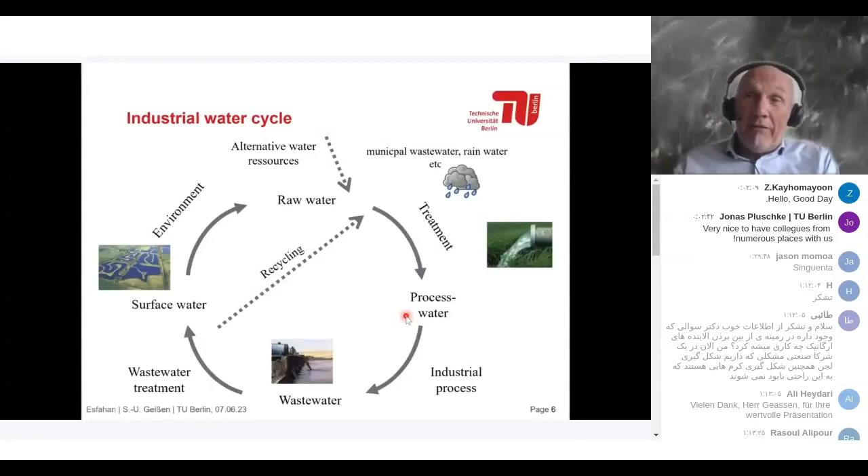We can take the effluents from industry—it's the same situation. We have production processes that are not balanced out over the week, so we have fluctuations during the week, during the day, and even during the hour. So we have to have buffers.

That's one challenge. Secondly, we have to have a transport function—we have to transport the water after treatment from one place to another, and this is a challenge. It's also a technical challenge, but we always focus on membrane processes, biological processes, adsorption, extraction and so on, while in most cases we forget the logistics. It's very important to keep in mind the transportation, storage, and handling of water after treatment.

So producing water out of effluent is not a challenge—you can do it, it's just a question of costs. But finally we have to store it somewhere and transport it, and then the question of microbiological contamination comes into play. In particular, you have high temperatures in Isfahan, and nowadays also in summers in Germany and Middle Europe, up to 30, 35, 40 degrees.

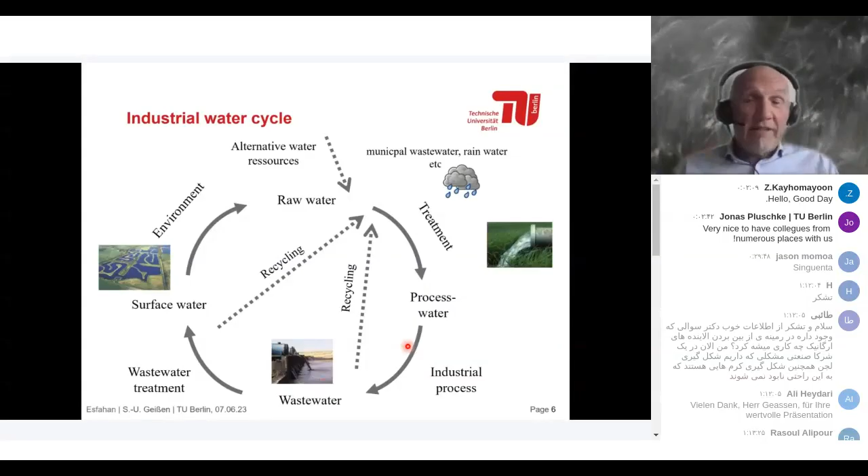Formerly, at different places, always fresh water has been used. So this is one example of many others. Go into the industrial processes and look what possibilities you have. This is something I mentioned partly already.

We have to look at the contents of water. We are always talking about wastewater, but looking at the content of water, it contains organics, inorganics meaning salts and metals, heat energy, and the water itself. Basically we are interested in the water, but nevertheless we should also be interested in the heat energy. This is something we have to take into consideration additionally. I will give you some examples on this later on.

So the question is, what will be the future for industrial processes? I would like to show you a publication from 2004. It's not very new, but what I have also read from the United Nations, the worldwide estimations with respect to industry are already the same. They are predicting an increase in water use or water abstraction. For this publication: manufacturing, 30% increase from 2000 to 2030.

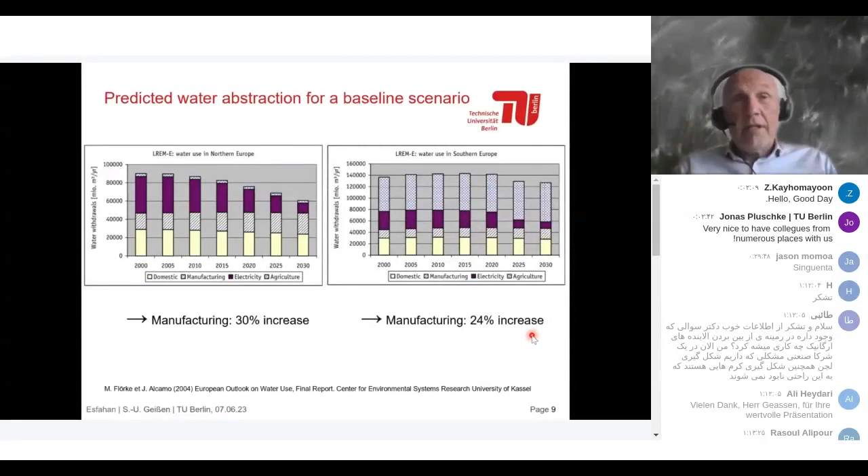This was in Northern Europe, and even in Southern Europe, 24% increase. The numbers aren't so important, the message is that all the predictions indicate we will have an increase in water use worldwide. That was predicted for Northern Europe and Southern Europe. The reason is high quality products require higher water demand.

But generally the question is, what is the German experience? And the German experience is different. We have a very old example, but nevertheless it's history - let's say it like this, it's history. This is for the pulp and paper industry.

Going back to 1974 in Germany, these German paper factories - we're looking at wastewater production in liters per kilogram of paper produced. There's a paper machine shown at the upper right-hand side. So how much water is used to produce one kilogram of paper? It was about 50 liters of wastewater produced per kilogram of paper in 1974.

What you can see in this diagram is that until 2001, we had a decrease of roughly 80% in wastewater production from the paper industry. Not absolutely specific numbers, liters per kilogram or cubic meters per ton. As a mean value in 2001, and nowadays it's more or less the same range, maybe it's 8 liters per kilogram of paper. So we have a dramatic decrease in water use.

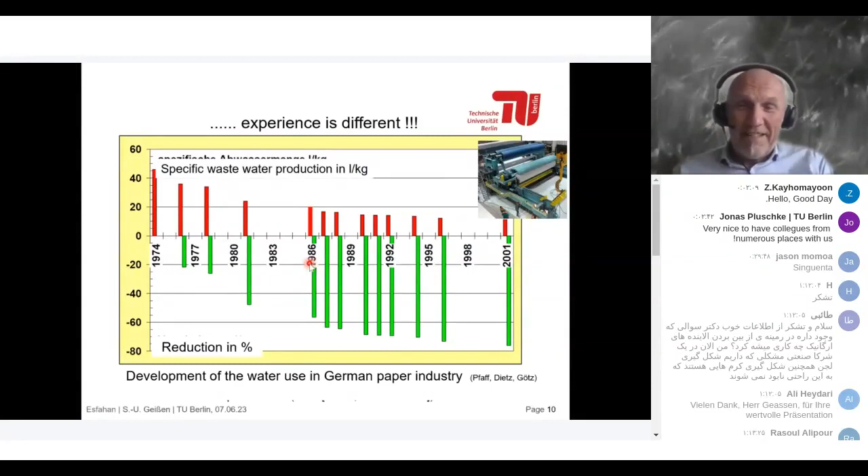These are the two effects: better or more efficient production machines and production processes, and additionally awareness. I've made the same experience when I moved into these industrial facilities many times - even nowadays I can observe possibilities to save water, very simple ones partly. So therefore, do it. Just do it, that's my recommendation.

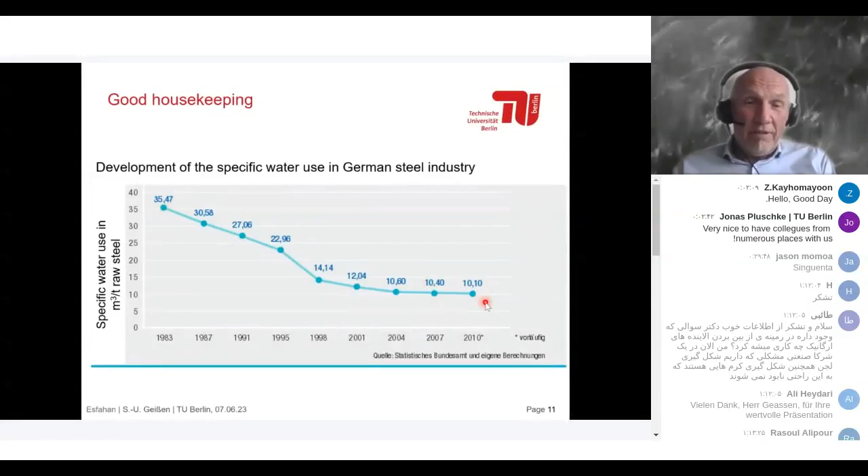So that was the paper industry. This is another example from the steel industry - specific water use, cubic meters per ton of raw steel. It's dropped down, even though in Isfahan the numbers are lower, but nevertheless for me the absolute number is not so important - it's just the possibility to reduce the water demand.

When we talk about water use, we have to ask what should be the quality of the raw water, or the quality of the processed water we use in industrial processes. We can utilize different kinds of raw water: surface water, groundwater, tap water, and alternative water resources like processed wastewater, rainwater, and municipal wastewater. All these raw water resources are utilized.

These are technologies to remove manganese, iron, suspended solids, etc. We have different possibilities, starting with natural-based bank filtration, for example. In Berlin, we produce part of our drinking water by bank filtration from the river. It's a natural-based system, and it's been working quite well for many decades. Natural systems like this are not too bad.

We have ion exchange—I guess all of you know ion exchange. We have flocculation, precipitation, filtration, disinfection, membrane separation, distillation, oxidation and reduction. These are the possibilities to pre-treat the water in order to make processed water out of it.

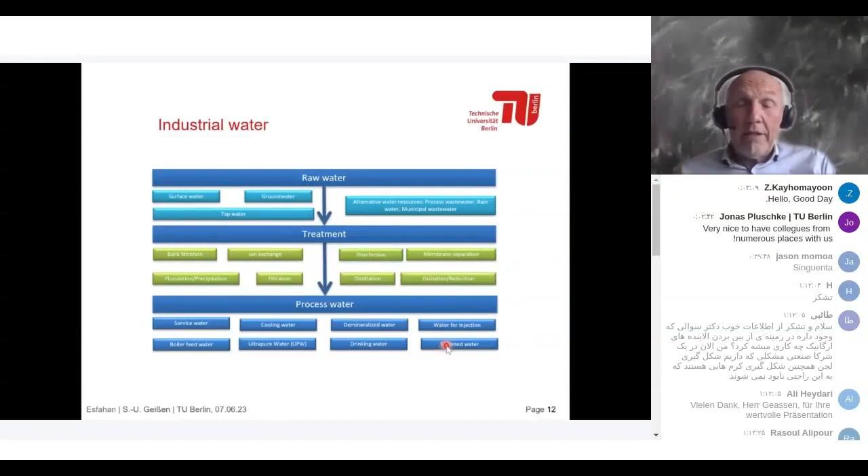These examples of process water qualities have different demands with respect to quality, and therefore this offers opportunities. Preparation of process water requires treatment—that's something we have to keep in mind. This is a question of costs, capex and opex, and the different quality demands offer opportunities for recycled water.

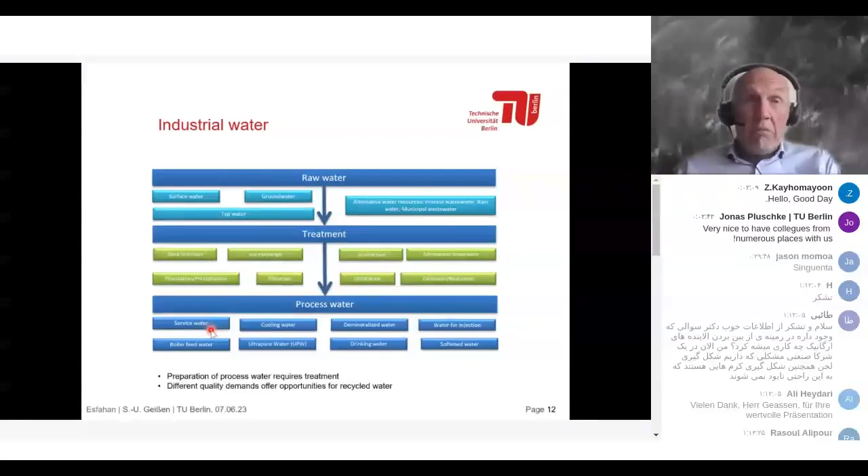Using recycled water for water for injection is not recommended, certainly not in the pharmaceutical industry. But you can use recycled water simply for service water, for cleaning cars or trucks, or cleaning surfaces in production facilities. You need certain quality requirements like no germs, no virus, no bacteria, but the quality demands are not as important.

This offers different opportunities, summarized here: different process water qualities offer the opportunity to reuse wastewater demand-oriented, and what's required is intelligent water management. This is the basis to apply a water management system.

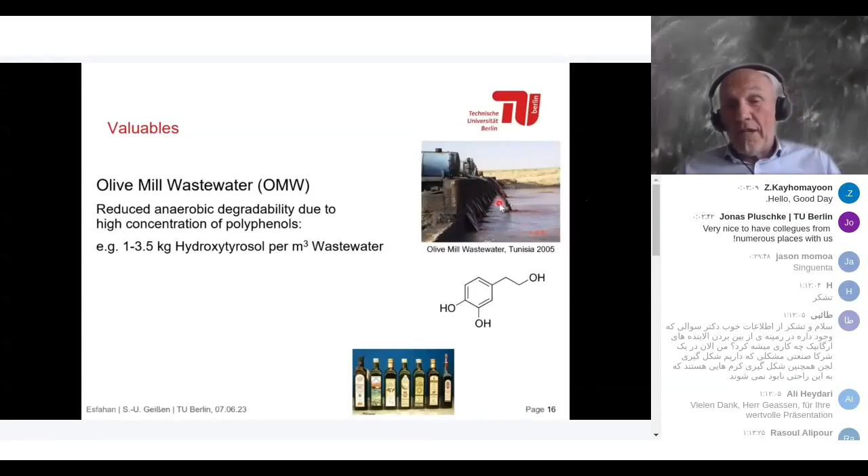It contains high concentrations of COD, in the range of 100 grams per liter, so highly contaminating the environment. For sure these open ponds are not sealed, so part of the olive mill effluent is entering the groundwater, and groundwater is also a scarce resource.

But nevertheless, what I'd like to highlight is that even in this wastewater, in this effluent, we have a high concentration of valuables—in this case polyphenols, 1 to 3.5 kilograms of hydroxytyrosol per cubic meter of effluent, which is quite high in purity, and you can easily calculate it's worth 50 euros per gram, so a high value is contained in these effluents. But this is a price for high purity, frankly speaking, and to generate this purity out of this effluent is more or less not feasible, I would say.

But nevertheless, it has a value, and we are operating a containerized plant nowadays in this region, in the middle of Tunisia, in order to treat the effluent so that the polyphenols can be recovered. Additionally, the polyphenols are natural-based substances. Olive is producing polyphenols, and therefore eating olives, but also consuming olive oil, is healthy because of the polyphenols. They have antioxidative properties, mostly present in the olives themselves and in the water, in the effluent here.

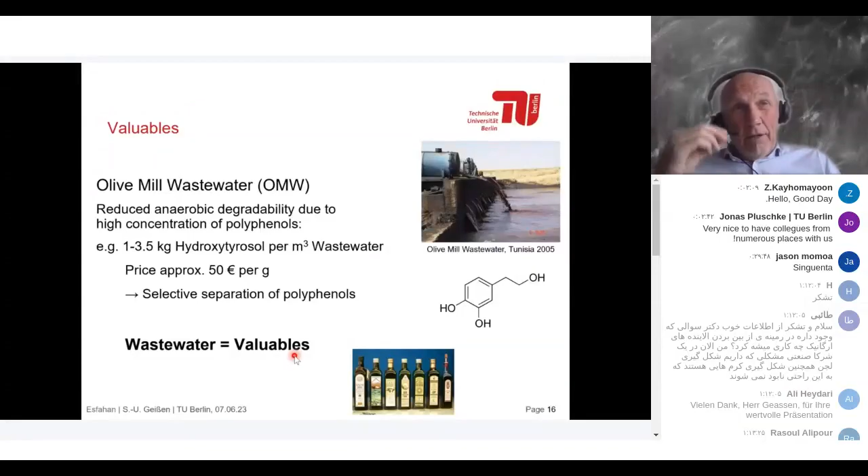And this you can transfer—it's an extreme example, I know. In many cases we don't have such high concentrations of valuable substances, but nevertheless, always think about this when going into a project. Think about the content of the COD, the organics, the TOC, the total organic carbon. What is the content of this carbon? Are there substances which might be of interest? Finally, those substances come out of the production—they're not coming from the heavens, they're just added by humans during industrial production. Therefore we have to ask ourselves if it's feasible to recycle those substances additionally. I know in many cases it's not feasible at the moment because raw materials are quite inexpensive. And the second point, we always have a mixture like here—you see it's dark, almost black, the effluent, and it's really difficult to treat and extract the polyphenols from such effluents.

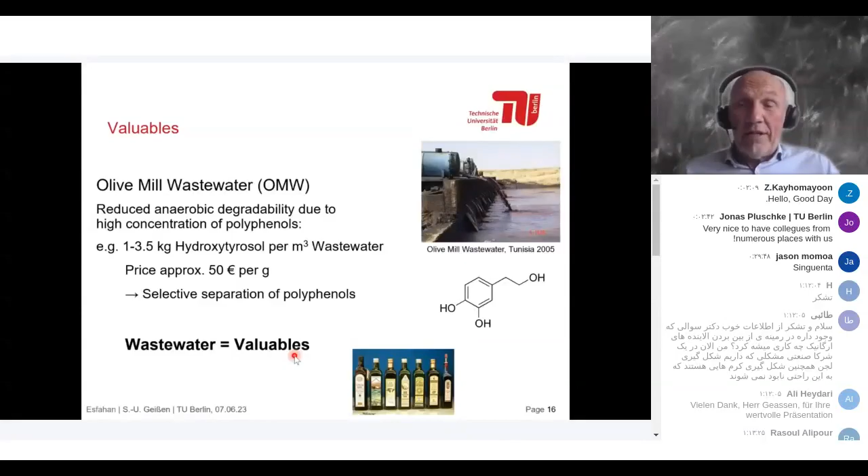But nevertheless, keep this in mind and ask yourself what are the organics present in the effluents. So we have the inorganics—that means the salts. In each and every effluent, we have salts.

That's also becoming a major concern in Germany, because maybe you've heard about the fish dying in the Oder River, near Berlin, partly the border between Germany and Poland in the northeastern part of Germany. You might have heard last summer, late summer, a huge dying of fish in this river. It was caused by low water flow due to dryness, less rainfall, and additionally a huge discharge of salts into the Oder River. This discharge of salts ended up creating brackish water concentrations, giving an algae—usually only present in brackish water—the opportunity to grow. This algae produced toxins, and these toxins finally led to the death of fish, huge amounts, thousands of tons of fish died last year.

It's clear the discharge of inorganics was one reason, not the only reason. And we are more and more concerned in Germany about salt concentration in our freshwater surface waters, like lakes and rivers. Our authorities are releasing permissions only if certain salt concentrations for industrial effluents are fulfilled. So our industry also has to look at the discharge of inorganics. It's obvious if a company is located at the Rhine River, like BASF or Bayer—the Rhine has a huge water flow, so if you add some salts it doesn't change anything, for sure not. But if you have a very small river and a huge production site, then it causes effects to the aquatic environment.

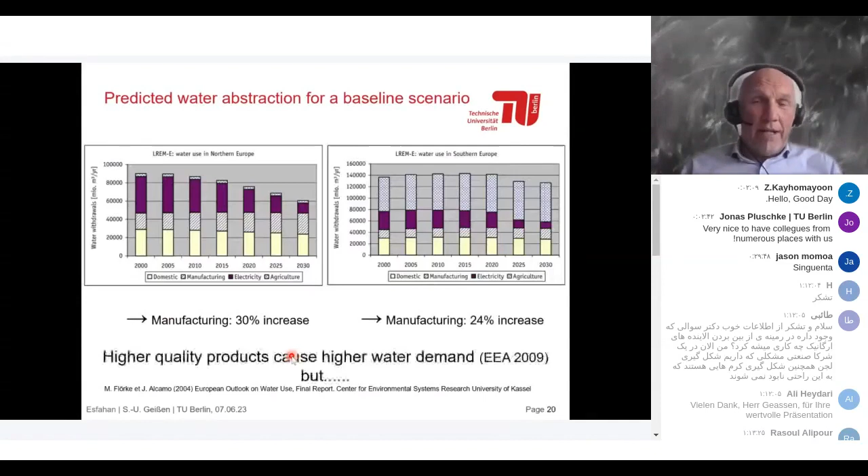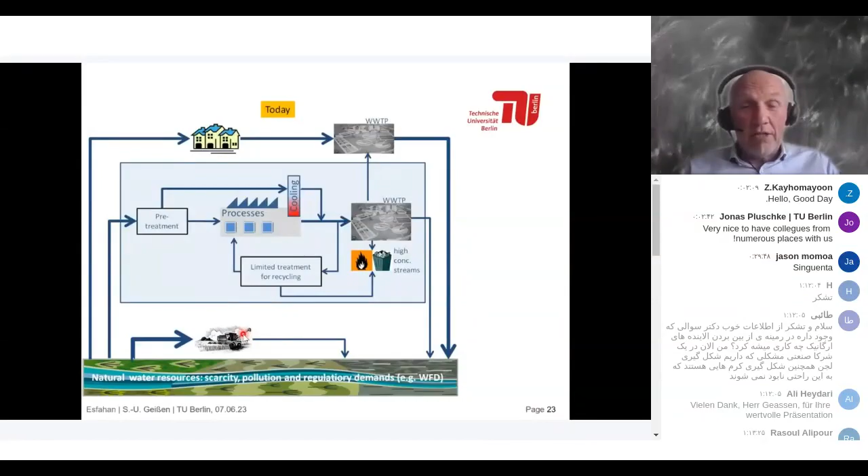The situation today, additionally, we have a huge amount of water used by farmers, by agriculture, which is partly also evaporated, partly going into the plants, and partly released back into the environment, going back to the groundwater. All of this is also related to the fertilizers and the biocides, etc., used in farming. That's something we have to keep in mind when we're talking about these water flows.

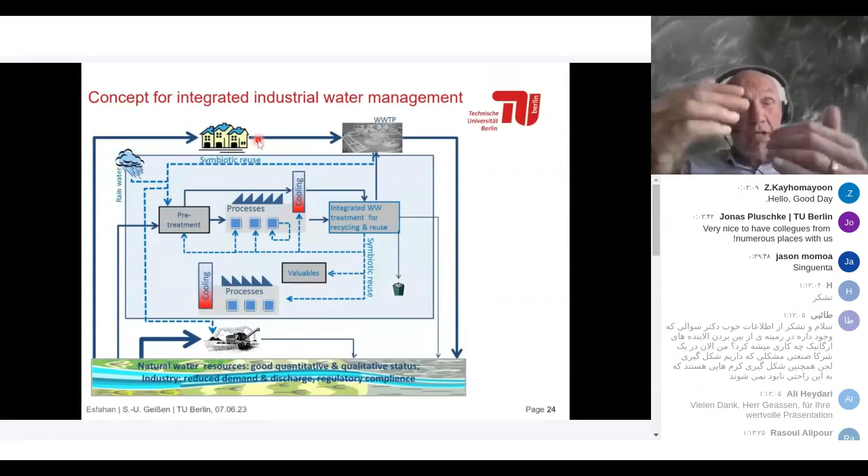So for me personally, I built a house 9 years ago, and I was forced by the authorities to take the runoff from my roof and bring it back into the groundwater. That was a must. And those houses, older houses which do not do so, they have to pay for it. So that's a very strong trend here.

Additionally, what we can see as a trend is removal of pharmaceuticals, trace pollutants, and recovery of phosphorus. It's also a very important topic. Phosphorus is limited, so phosphorus resources—the predictions are somehow different, but as a mean value, we have resources for another 100 years approximately. Then they'll end. So therefore, we have to look for phosphorus recycling, and that's implemented right now in Germany.

We can recover—as you might know, Germany is importing 100% phosphorus. I do not know the situation in Iran; you also have phosphorus resources, but I do not know the situation there. So in Germany, we have to import 100%, and out of this 100%, we can recycle about one third by installing phosphorus recycling in wastewater treatment plants.

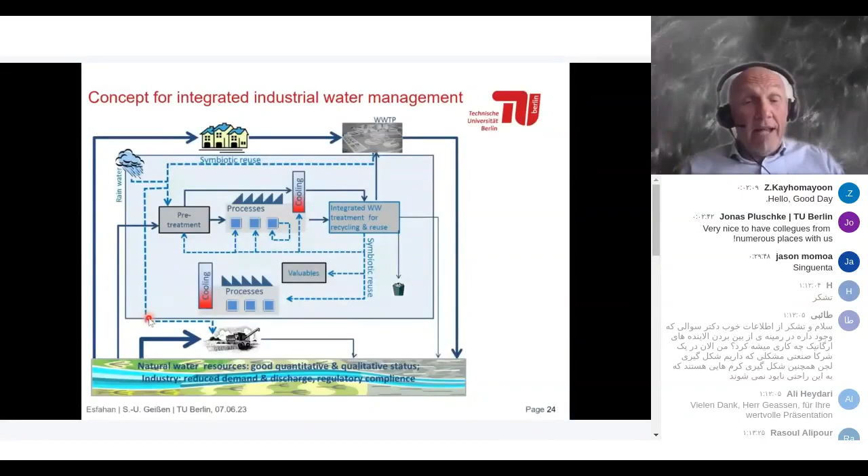I was last week in Morocco. We have a European funded project with Morocco, Tunisia and Jordan, where we're discussing alternative water resources. One resource is effluent of municipal wastewater treatment plants, but the Moroccan authorities and associations clearly stated that they are not willing to use effluent from municipal wastewater treatment plants for irrigation of agricultural products at the moment. It's a very difficult question, because for sure this effluent contains contaminants, and these contaminants are finally ending up in the agricultural products and in the soil. So it's a very difficult question.

So that's the concept. We have had a large project called E4Water. The homepage is still existing, you can check it on the internet - search for E4Water. It was a huge project with 19 partners, more than 40% from industry, in 9 countries, with 6 industrial demonstration sites: Procter & Gamble, Total, Solvay, Dow, Kalundborg in Denmark. Project volume of 17 million euros and funding volume of 11 million euros, and it ended in 2016.

With this, I'd like to show you our approach. What we did is look at different levels for modeling and simulation for integrated water management inside industrial process facilities. That's the first approach - the upper level is the integrated urban water cycle, meaning integrated water resource management, which is what we are doing in Isfahan also. But the next level is the process level.

So we have to go to the process level, and finally move into the process unit level - for example, an aerobic wastewater treatment plant. And if this is not sufficient, we need also to look into the fundamentals - how does reverse osmosis, for example, work - in order to have a complete modeling and simulation for this site.

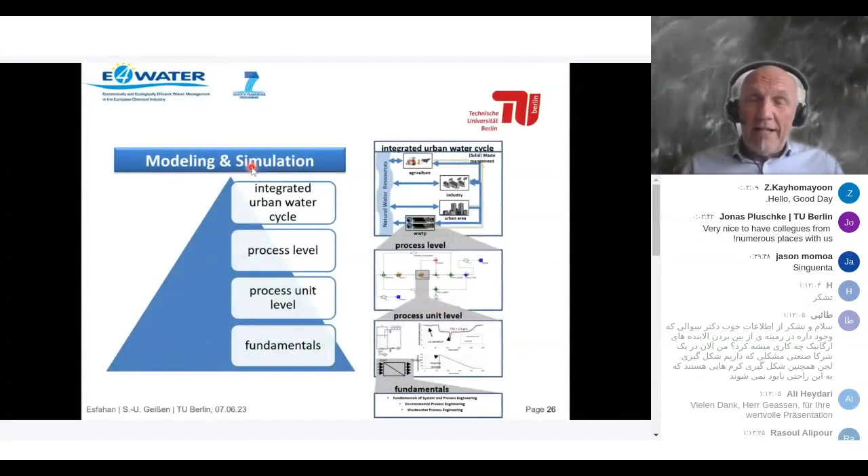This is what we did for one site - it was a PVC production. A lot of information here inside, but just showing you how it looks like. On the left-hand side is the raw water, well water, which is in a location in Spain. Here is the water intake, which is then moving into the pre-treatment, different kinds of pre-treatments. Then part of the water is entering into the cooling water.

Now this is a cooling water cycle - there's a huge amount of water which is recycled here. The width of these arrows is giving you the amount of the water. Then we have the different production sites or production units, and finally downstream here is the wastewater treatment and recycling system, just as information.

I will not go into detail, but just showing you that with the tools which we have available, it can be managed - not easily, but it can be managed - to install such a water and energy management model. As the name says, it's not only related to water, it's also related to energy.

Additionally, what we did is utilize all the elements - we looked at, for example, magnesium and calcium. These are salts which are producing hardness, which produce scaling on top of the pipelines, the membranes, etc. Therefore, we said we have to follow up also calcium and magnesium, the hardness builders.

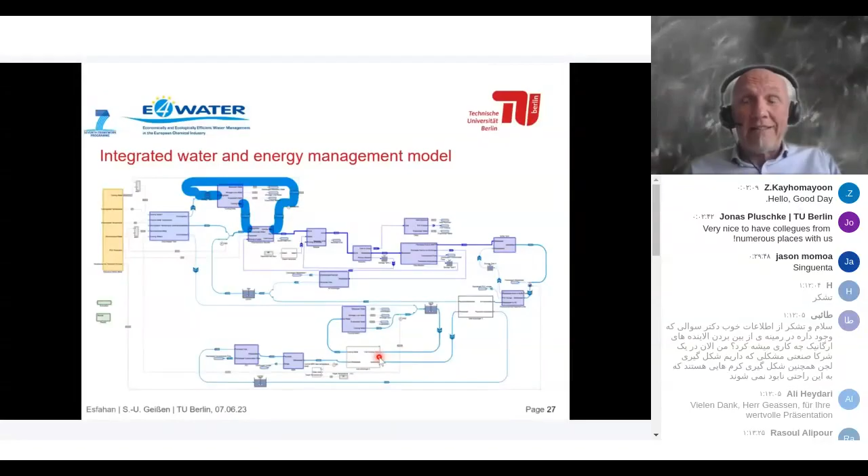Yeah, and this is something which you already know. This is Zayandeh-Rud basin, maybe a 30 large industry. Maybe it's a little bit boring for you. I will give you all the slides, you can go deeper inside. There's a lot of publications available, but I think this is something which you already know.

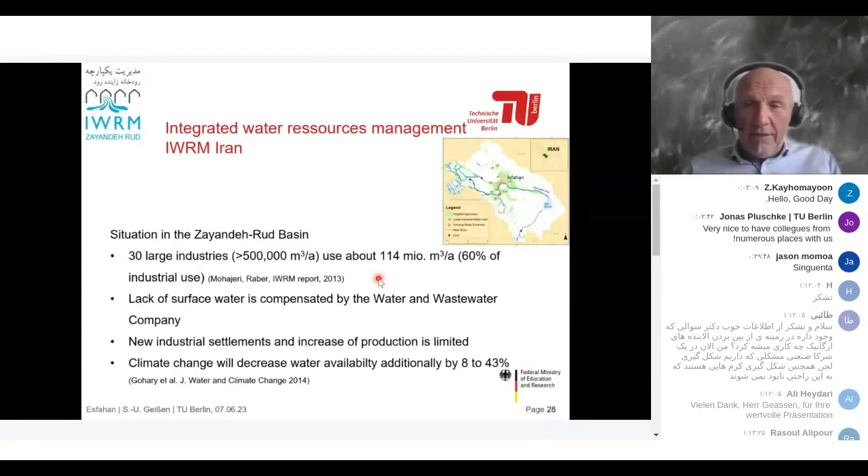So what you might not know is we have many information resources available. They are for free, so I'd like to introduce to you only one position paper. I am also head of a working group inside DECHEMA. DECHEMA is a large association of the process industry, and companies like BASF, Bayer, Covestro are members of this DECHEMA association. Within this working group or specialist group, we release several studies.

One study is Trends and Perspectives in Industrial Water Technology 2030, which is available in English now. You can download it for free, but we have others dealing, for example, with zero liquid discharge - is zero liquid discharge a sustainable solution or not? So all of this information is for free, and there are experts from industry, universities, and research institutions that cooperate in order to generate such position papers.

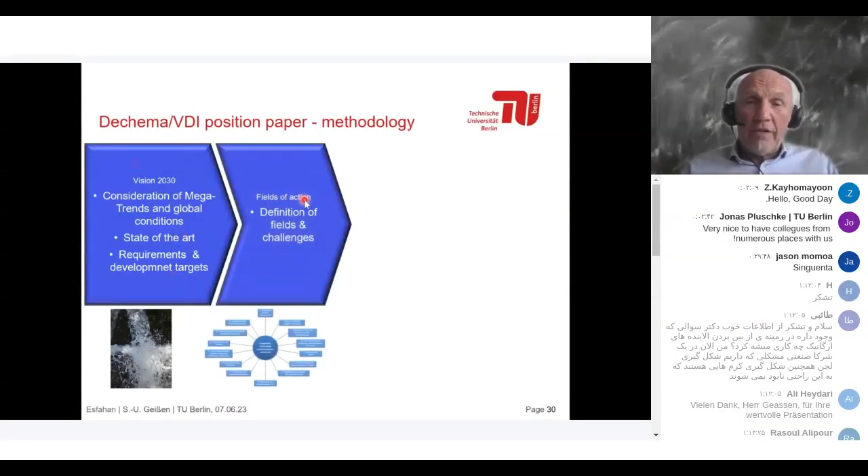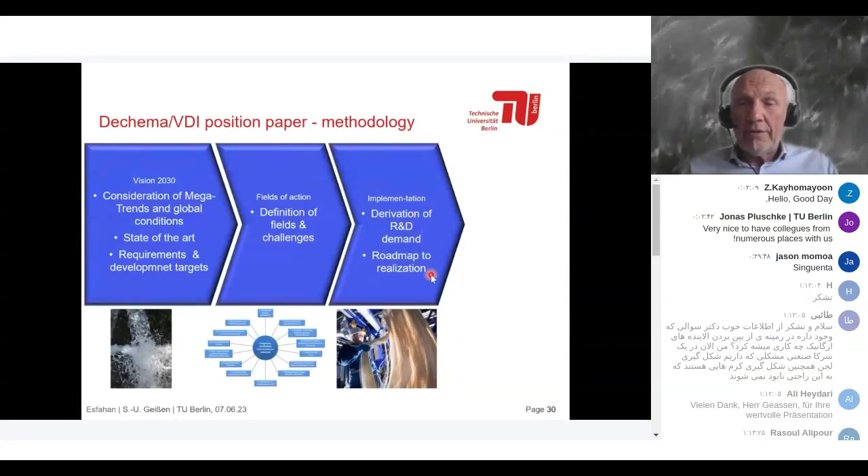Yeah, only one example, we have many of them, and you can download them for free as I mentioned already. This is an example here, the position paper, the methodology. We looked for the mega trends and global conditions generally for 2030, the state of the art, the requirements and development and the targets. Out of this, we developed the fields of action, definition of fields and challenges, and then the implementation, derivation of research and development demand, and the roadmap to realization. And this finally should end up in integrated sustainable industrial water management.

Another paper I'd like to mention, maybe Masoud can give you the link at the end of the day - maybe you've heard about this, Masoud, the BREF documents, best reference documents. Masoud, have you heard about this? No, I have not heard about it. It's a very, very good, I would say, one of the best documents I know.

Again, they are for free. You can download them - enter in the search machines BREF, B-R-E-F, and Sevilla, the Spanish city, or Europe, or whatever, and you will get a link to BREFs for each and every industry. So steel, paper - these are documents containing, let's say, about 400 pages or so, each describing the different kinds of processes used for the industrial process, which also address waste, gas emissions, wastewater and wastewater treatment. Everything is described inside all these BREFs. So it's a very good database for you to get more information about the different industrial processes.

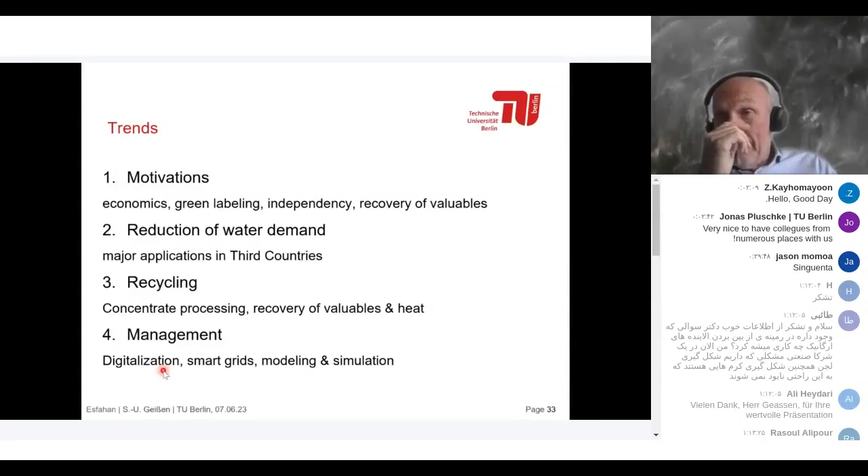In wastewater treatment, we're far away from this, but we are moving into digital twins—not only to train people, but also to improve the performance of the plants, and to predict what happens if we have a strong, large flow via flooding, for example, or extreme conditions, extreme temperatures. This is something which can be answered with digital twins.

PhD candidates in my team. And for those of you who are students, I'm embedded into the Institute of Environmental Technology. These are bachelor and master courses, environmental technologies, one of the oldest courses worldwide. It was started in 1976, environmental technology at Technical University of Berlin. Six chairs are basically responsible for the education, and my chair is one of those six chairs. We have about 100 students starting each and every year.

And finally, 60 are ending up with a master degree at the very end. Thank you very much for the attention, and we can discuss as you like. If you have questions or remarks, comments, please start.